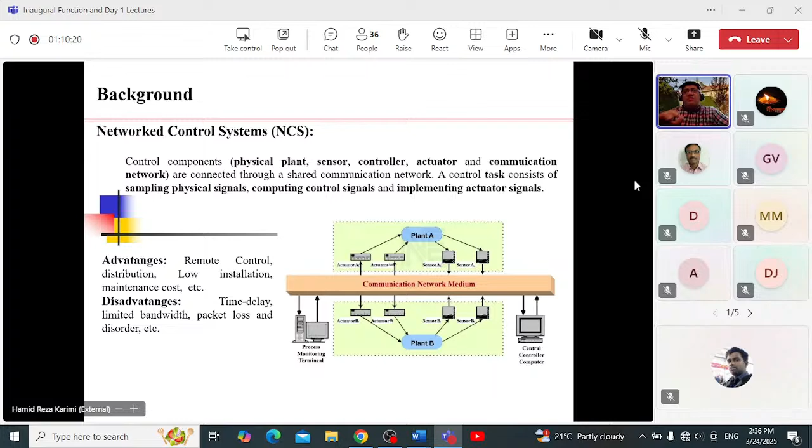So besides NCS, we have the topic of CPS, cyber-physical systems. This is the topic we're basically focusing on in this course. The first thing is that CPS potentially can become an intelligent system. By adding some software, networks, and the cloud, it means that CPS can communicate through the cloud. Now we have a cloud-based design, and also industrial and information technology can be integrated in this system.

So CPS is also called a basic integration of the physical and the networks. And we have issues about computation, communication, and again, control, very similar to the context of NCS, the networked control system. Again, we have sensor positions, sensor selection, and we need to look at the physical system itself. The network also exists, and we have issues about the cyber systems.

So if you look at CPS, first of all there is system awareness, data sharing, and real-time analysis, and this kind of information should be sent to some sort of decision making for the task of system operation. So how the knowledge can be produced and how the knowledge can be circulated for better execution or operation of the system. Of course, optimization is always a concern of CPS.

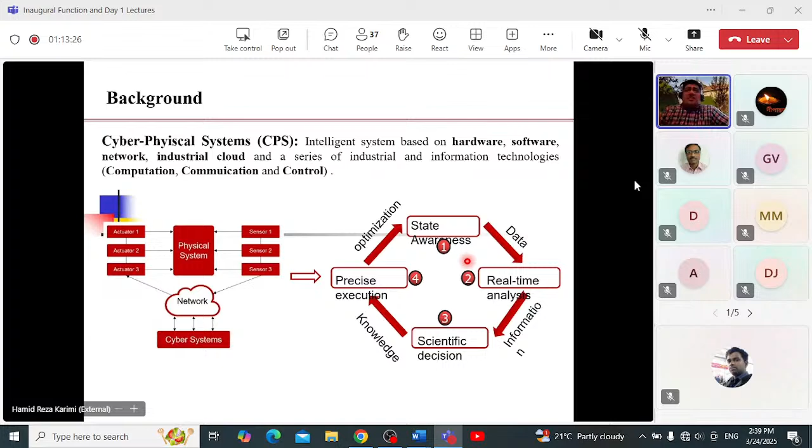And how the knowledge of the expert, I'm talking about the owner of this plant, could be sent as set points to the different subsystems is a very challenging topic. We have network integration, then we need to look at cybersecurity and resilience. This could be one example, and this example is very important in different locations, specifically for India.

Another technology is internet-based teleoperation. Again, we have a teleoperator as a master manipulator and also a slave manipulator. This kind of teleoperation has now become a very emerging topic in manufacturing and also in health. In Italy, we have a big European project about teleoperation for surgery in the hospital.

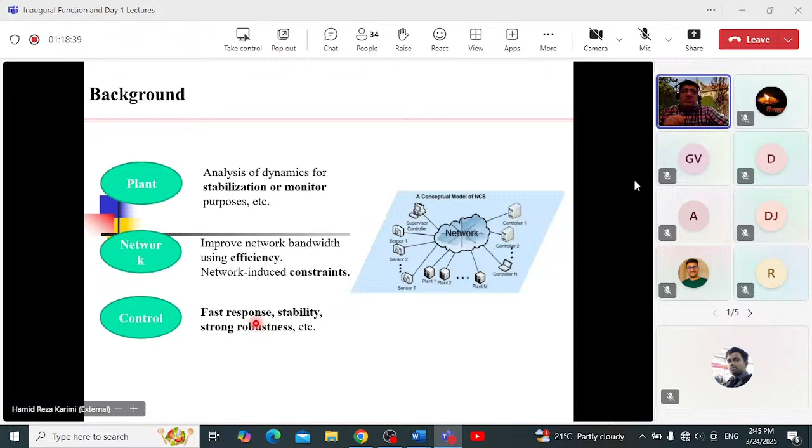In this course, we are talking a lot about different control scenarios. For instance, sliding mode control to get not only a fast response but also in limited time, meaning in finite time, with good robustness. So in the topic of CPS and NCS, depending on your interest, if you want to touch the modeling, the network, or the control, there are a lot of challenging topics. And of course, these are the matter of discussion papers.

At that time, they focused on future trends in real-time networks and wireless networks, and this was a very successful special issue. Then there was another special issue in the IEEE Control Systems Magazine. In this special issue, in the same year, 2007, other important scholars put forward the topic of complex networked control systems. This opened another research line, so other research could become the hot topic, and new topics have been added.

One of the new areas that has been added is resiliency and cybersecurity, and this becomes an important topic discussed in this course. For control systems, in 1998 it was introduced. So now we can notice distributed plants and real-time control. It means the integration of the physical process, the sensors, actuators, and controller through communication networks. This integration should be done in real time.

And this data transmission between devices is one of the key aspects of the utilization of NCS. So how can we realize resource sharing, coordination, manipulation, and also saving bandwidth? These are some topics where we need to look at the data scheduling from the sensor to the controller through the communication networks.

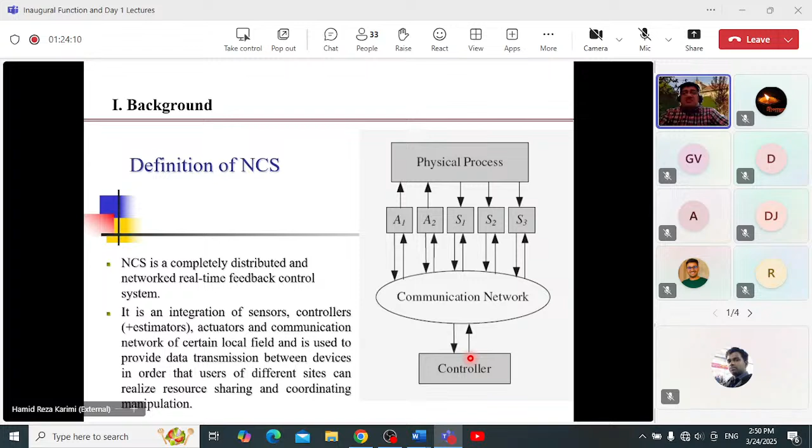So we have some typical NCS. So this is a model of a network control. So again, we have the plant. We have a controller. So we have the sensor, coming to the networks and also sending it to the controller for computation. Again, the data should be sent back to the actuators. So this is a typical NCS. And the network characteristics play an important role in these scenarios.

Okay, so if you want to make it as the filtering part, as an estimation, the same issues we have for estimation or the filter design. For instance, if you have a physical plant, and if you have some sort of input like a noise or some other information, so if you look at the two kinds of data, this is your signal, for example, your target signal, and the signal Y could be the measured signal. Then you can see after filtering, you can get a better estimation of this target signal, and then you will have the error signal.

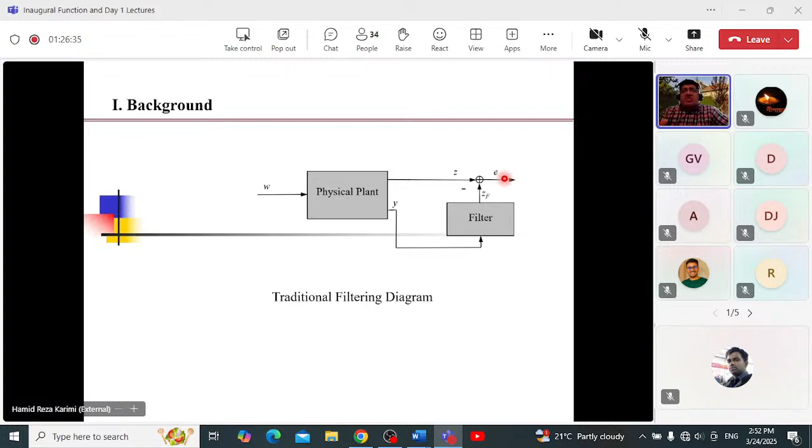So in these scenarios, we can see that this filtering part works based on if you could have a better filter design, then the error signal could converge rapidly to zero. So this could be the traditional approach, but if you want to take it over the networks, again, the data from the sensor should be sent through the network.

So now you can see the network-based filtering diagram. It means that the measurements are sent over the communication networks. So again, here it is very similar to the traditional approach because we are analyzing the error signal, but here the additive part is the information of the network, and this brings some challenges to the estimation part.

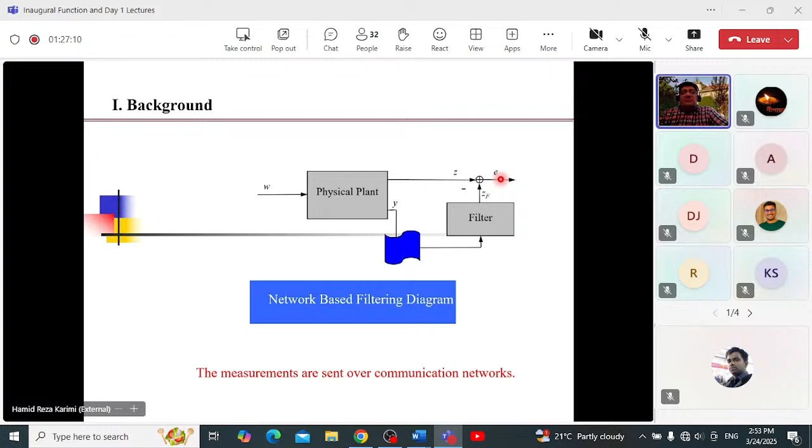Okay, so the advantages of NCS with respect to point-to-point interconnected control systems: the first thing is increasing the system reconfigurability. It means the scalability can be enhanced. So you can enhance the resource utilization, the reliability. So you see that the reliability can be enhanced in the context of NCS, because if you send less data with event-based control, then the system performance can be enhanced while saving bandwidth.

It reduces the installation and maintenance cost, because for wired point-to-point control, you can imagine how much cost goes to the installation part. But for NCS, you can minimize the installation and also maintenance cost. Supporting distributed control and intelligent devices means that you can move to smart control, a smart device, a smart sensor. Distributed control not only enhances the system resiliency, it also brings the opportunity to use smart devices. So based on these advantages, NCS became a very hot topic, and there's a lot of research on NCS.

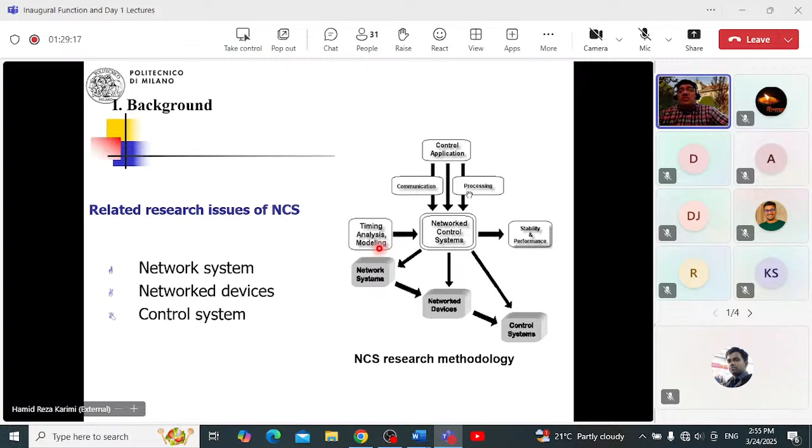So if you look at the network system, network device, control system, all of these bring some gaps for research. For instance, if you look at the network control system through the network system and network device control systems, we have a lot of issues about stability and performance, in real-time processing, communication through the control applications, and also about timing analysis and modeling. We can expect many issues, such as infrequent sending of data to the networks.

So when it comes to the controller, how to handle the decentralized information as well as the centralized information. There could be a huge discussion on how to move on from the central management level. These are the human knowledge. You see that an important topic in CPS or NCS is how to integrate the human knowledge, the management knowledge or the operator knowledge into the system operation.

So this topic of HMI, nowadays in Industry 5.0 in Europe, is one of the key topics: how to integrate, how to look at the interface between the human and machine, another interesting topic. And now there is another keyword, HMCI.

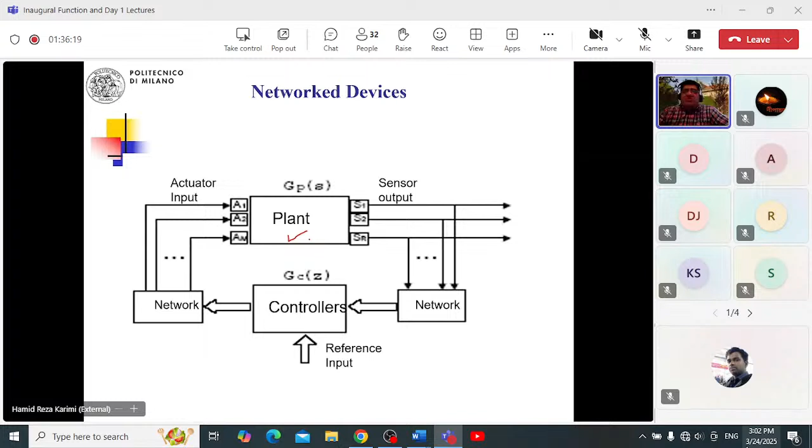Either you have a physical plant, you have a knowledge of the model, or if not, you have a data-driven model. So you need to look at this. So for instance, in the control system, you can look at the direct structure. In the direct structure, first of all, the sensor and actuators are at the same side of the plant, but only the data from the sensor to controller to actuator goes through the networks. So this is basically the sensor measurement and control signal, and this we call a direct structure. The direct structure means that the sensor, actuator and also plant have this orientation.

Another is the hierarchical structure, which is a bit different. In the context of NCS, it means that for these scenarios of the plant and also the sensor and actuator you can see here, there is a sort of remote system between the sensor data measurement, through the networks, to the main controller. So based on this kind of data packet sending from the sensor measurement to the main controller and to the actuators, there is also one unit as a remote controller. This remote controller will also be added to this remote system for the system operation. So this could be another architecture-based component.

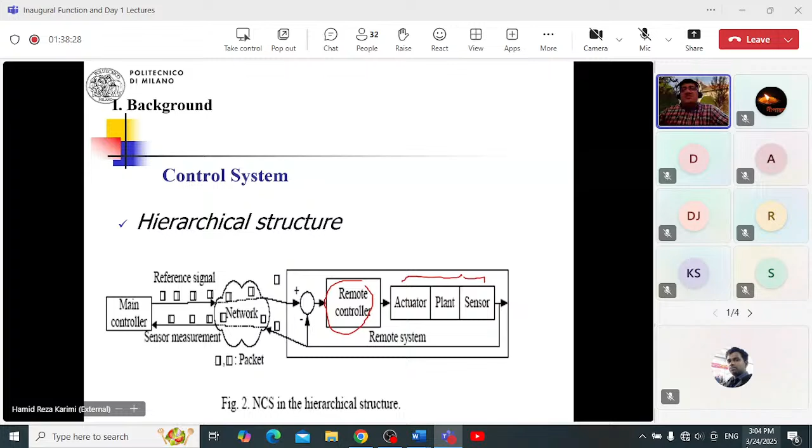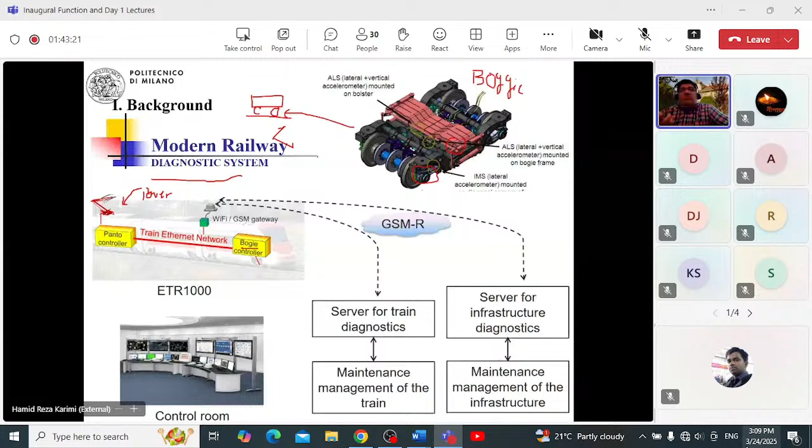I personally teach the bogie modeling to master students. But if you are interested, I can also give you some material about how to model this device and how to look at the stability of this device. One question for you is: if the speed of the train increases a lot, why is the train out of control? And how can we look at the high speed train? High speed train, what are the limitations? If you are interested, I can also explain in one of the tutorials for you. Okay, so now you can see that in the topic of NCS, we have a lot of challenges.

One topic is the signal transmission delay. So another topic could be the delay in the communication due to the buffering and propagation. So delays are bad for the controller. So from the sensors to the controller through the networks. So this could be the normal sampling.

It means that we have some sample data, and these are the 3 samples from your measurement YK. And this sample data can be sent basically to the controller node. Okay, so this is a signal YK. So for example, here you have a signal YK. So this signal can be sent to the controller, but now you can see that the data you get at the control node is a little bit shifted.

Now you can see that this signal can be sent to here, and also this can, for example, come to this position. So this is some sort of delay. TKSC is the time delay between the sensor and the controller. So when you send again this data after the computation, based on the delay from the controller to the actuators, there is another delay, TKCA.

Now you can see that this sample data can be shifted to the right. And again, this is also another delay that can be added. So now this is your sample data at this position where it reaches the actuator. And then if you want to send this control signal, it could be like this. It means that the control signal can be updated at this time, and not only at the sampling time K-1H. And if we look here, this is K+1H.

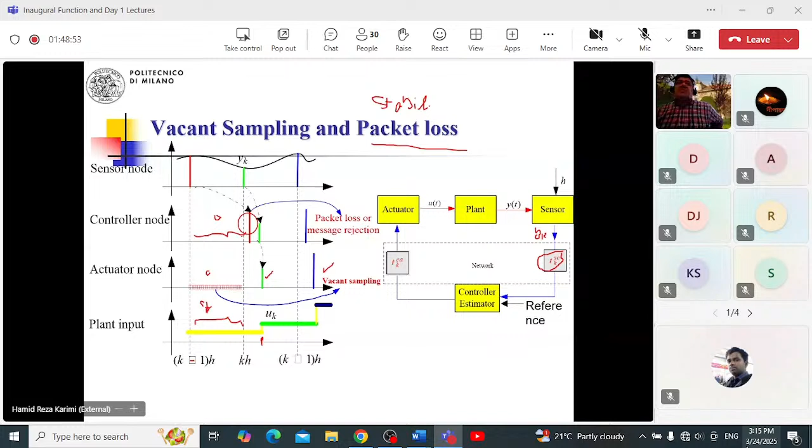Okay, so now you can imagine the NCS challenges and the solutions. So basically, okay, so there is one question. So yes, please. Do you have any questions?

Yes, sir, I had a doubt about the previous explanation. When one data is getting into the range of another data, on the next step in the actuator node, how is it reduced to only one data in that time frame?

So at this sampling time, because this red signal is sample data coming from this K-1H, but the system is ordering. The system can react to the green signal, because here you could expect some congestion of the data. The system basically can react to the information of the green signal, because the red signal is out of use, and that's it.

For instance, if you look at the sensor data from controller, from the sensor to the controller, the green signal arrives at this position, and the controller can react to this signal. This signal, in fact, some packet has been lost, and also has been rejected by the signal, because you know that the network has a sort of delay.

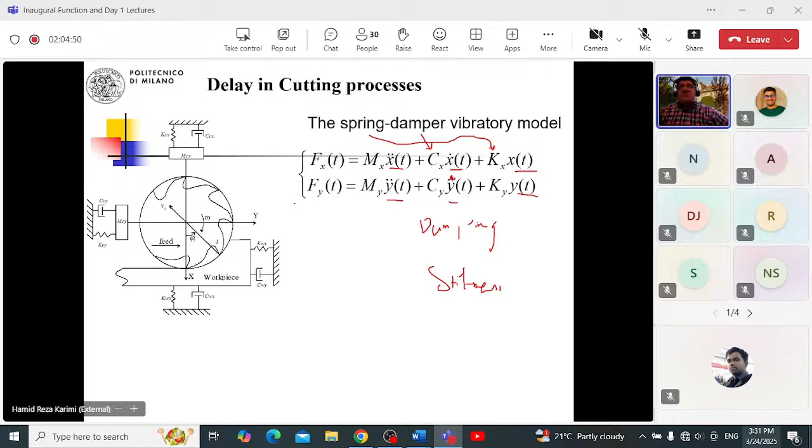If you look at the two forces, fx and fy, based on this mathematical model, you can start to look at the surface that can be generated. Here is the same problem - you have two forces here, two forces there, exactly the same x and y, and this cutter starts to rotate. At this position, this is the tip position of the cutter as it starts to touch the surface.

This area can be modeled like this point - it means the cutter touches the surface, but there is some oscillation, and this oscillation represents quality. If you want to get a good quality surface, you need a much more smooth surface.

Why is the surface not good quality? Because of vibration, and that's it. The topic of vibration is a very important topic. In this particular case, you need to know how to mathematicize the delay.

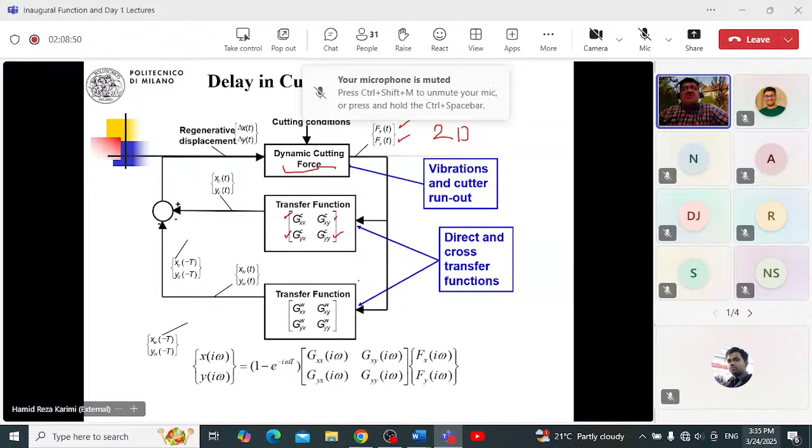You can also obtain some transfer function as a direct and cross transfer function. These are functions you can obtain, but I'm not going into much detail, I just want to show the main idea. In this transfer function, you can see there is a sort of delay appearing as a parameter t, because my focus is on t.

This delay appears in the sampling time. In the Laplace transform, you get this exponential term. This exponential term represents your ideal transfer function, and this is the transfer function after the vibration effect. If you look at this signal delta x, delta y as an error signal at this position...

You can obtain this kind of information in the frequency domain. This is about the appearance of the delay. In this case, if the delay appears, this exponential term should be added to the model, then you need to add this exponential term for the delay.

Now the delay appears in your transfer functions, and what you need to do is design the control to compensate the delay. So now the topic of delay compensation is important. In this application, you know exactly the delay, because I showed you how to calculate it. The next step is to design the control. This was one of the projects we did some years ago, and if you're interested in this area, you can contact me.

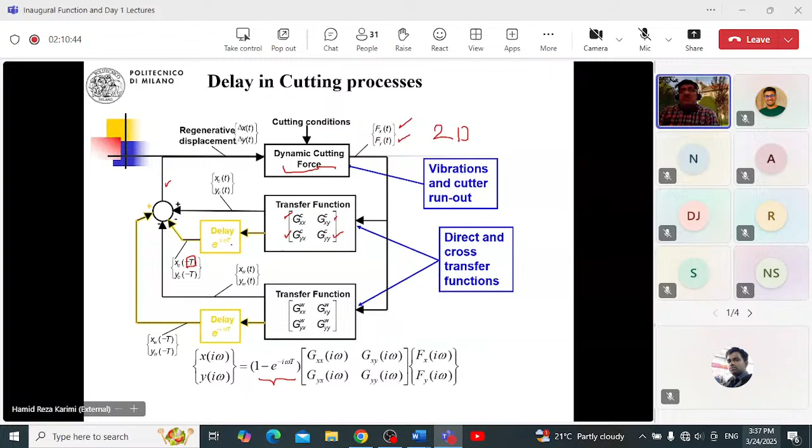For example, they are producing some goods, or even producing fruit, or transportation of the fruit from the south of India to the north of India. It means that you have a large production network. So there are a lot of autonomous working systems, and they are connected. But the point is that you get some order.

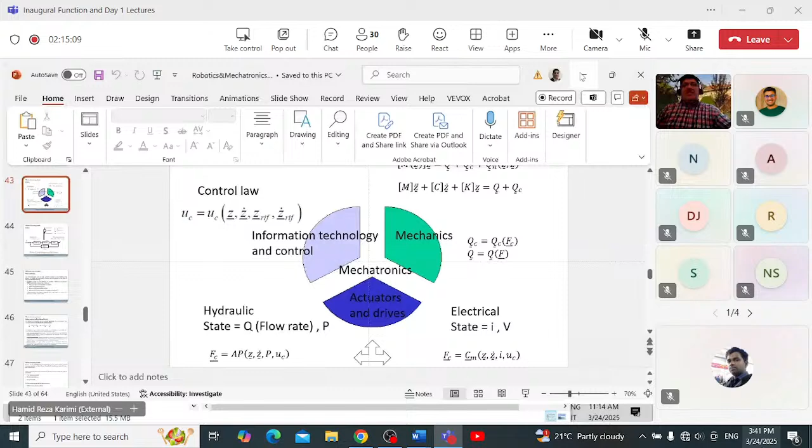Excuse me, sir. Can you share your slides? Yes, sure. I want to start the second lecture. Do you have any questions about the first part? If you kindly share the slides, it will be great for us. Oh, sure. I will send you all the material through the course coordinator. Okay. Thank you, sir. Okay, thank you.

Okay, so the second part I want to discuss is about the design issues for control systems. For this part, I would like to tell you a little bit more about the design issues for control. One topic is stability, which we discussed before. Today we focused on the sensor, the actuator, the system, and also the sensor model. But here, based on your sensor data acquisition and the reference signal, you could think about the performance and also stability.

For the stability and the performance, how capable is the system of following the reference signal? Because one topic is reference tracking or adaptive control. It means how to reduce the effect of the measurement noise. Where we have noise, we have some uncertainty in the model. So all these topics you need to look at in the design. When you design the control, first is stability, second is performance. The performance reflects the noise issues, uncertainty in the modeling, the disturbance, or even the reference tracking.

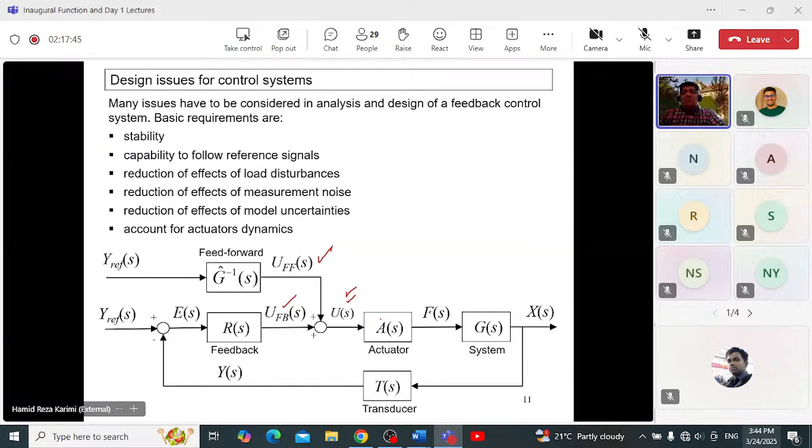So now if you design the control, perhaps you think about feedback control. Feedback control is to enhance the stability. At the same time, you can think about feed-forward control, which can be useful for the enhancement of the performance. So here you have two control signals: one is the feed-forward control, the other is the feedback control, and the total control becomes U(s). Okay, so this control signal can be applied. If the system is ideal, you can expect that the model of the sensor and actuator is identity.

Okay, so for this, identify the sensor and actuators with this function. So you have this typical system, and in this typical system you have sensor noise, you have a disturbance at the actuators, and also you have some issues about the error signal. For convergence, this should approach zero. At the same time, you need to look at the effect of the noise and also the disturbance.

So for this particular case, if you want to start to analyze, there are several transfer functions you can obtain. The first is the signal X(s), which you can calculate from this function. And also you can obtain the control signal U(s) from this function, and Y(s) contains the noise. If you look at this model of the system in the Laplace domain, the frequency domain, you can see that the noise appears here, and the disturbance D(s) also appears.

Okay, so now the important thing is that if you want to get a better control signal U(s), your control signal should mitigate the effect of the noise and the effect of the disturbance. But the problem is that the noise appears in the information Y, so how to look at the noise compensation. This is one of the challenging topics we have in the design issue.

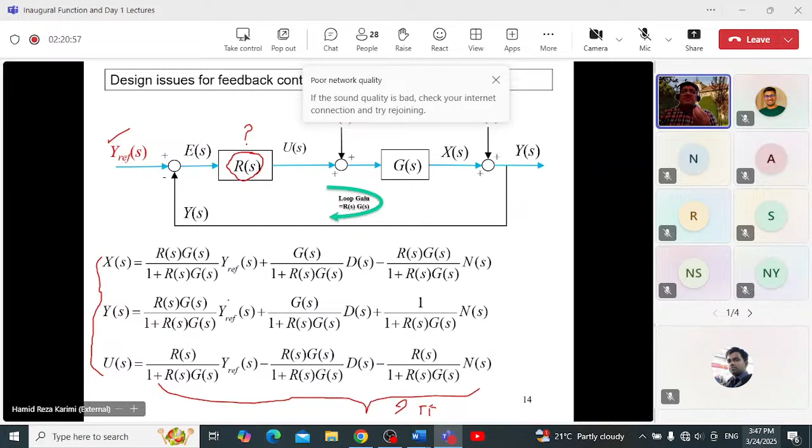So now the question is, if you want to design control, you can define errors, and you need to pay attention to how to design it in such a way that the reference signal appears in Y(s). It means that you need to do tracking. If you want to do good tracking, the error signal should go to 0. At the same time, you need to mitigate the effect of the disturbance and the effect of the noise. And everything should be based on these 9 transfer functions.

If you look here, the function Sn represents the effect of the noise. So you need to mitigate it, for example, Sn should become less. L(s) should increase, for example L(s) to 1. If you increase L(s), at the same time you can see that L(s) is multiplied by D(s), and this also increases the effect of D(s). So now there is a trade-off. If you want to design the control, there is a trade-off between L(s), Sn(s), and SL(s).

At the same time, you need to find a suitable control to find the optimal solution for this trade-off, because otherwise there is no solution. This is a challenging topic: if you want to improve something, then another thing destroys the performance. And this is the problem we have. Okay, so what should we do?

We need to look at 4 functions. One is the transfer function L(s), which tries to bring the reference signal to Y for tracking. Then you need to look at the 2 sensitivity functions, for the noise and for the disturbance. And there is another sensitivity function that gives the measured process response Y(s) to the measurement noise N(s). So now you need to pay attention to these 4 functions in the frequency domain.

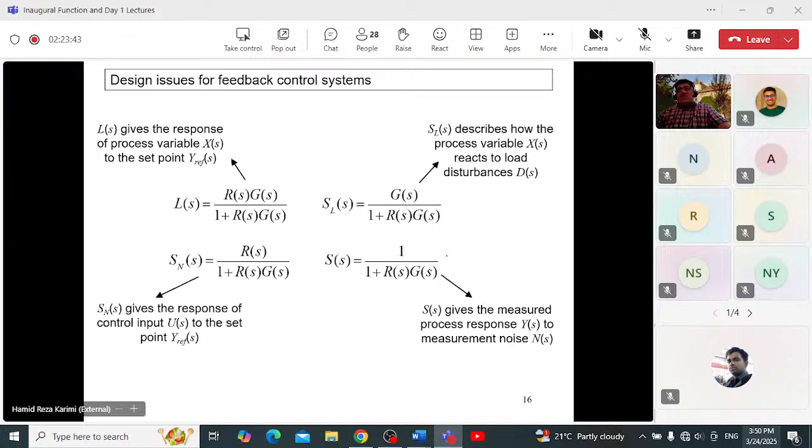Of course, there is some conceptual background coming from Bode. If you look at Bode's statement, he wrote his thesis, and in 1945 he published his state-of-the-art work on network analysis and feedback amplifier design. So Bode in 1945 introduced the topic of this function. This is the basic, simple case to find the trade-off between the basic sensitivity functions and how to manage the gain.

So the Bode integral says that this function over the frequency should be zero, and that's it. So this should be basically the one solution to satisfy the performance of the system for the sensitivity function. But if this function becomes zero, you can see that this function is an ln function. Some range should be positive and some range should be negative, and then this becomes zero, okay?

So if you want to see when it is positive and when it is negative, it depends on the magnitude of S. If S is less than 1, or if S is bigger than 1, here you will get positive, and here you will get negative, and then in total you will get zero, okay? So in these scenarios we need to find a trade-off to check the performance of the system, and this is exactly the task for the design.

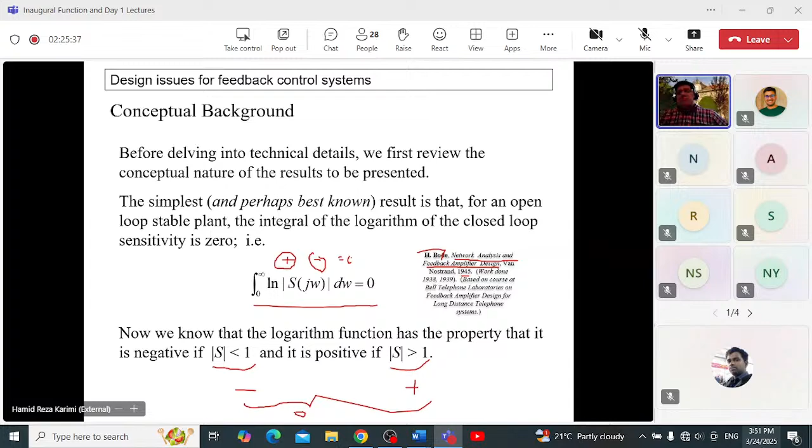Okay, so in these scenarios, you need to find the optimal parameter R, and then see at which frequency you want the norm of S less than 1, or at which frequency you want the norm of S bigger than 1.

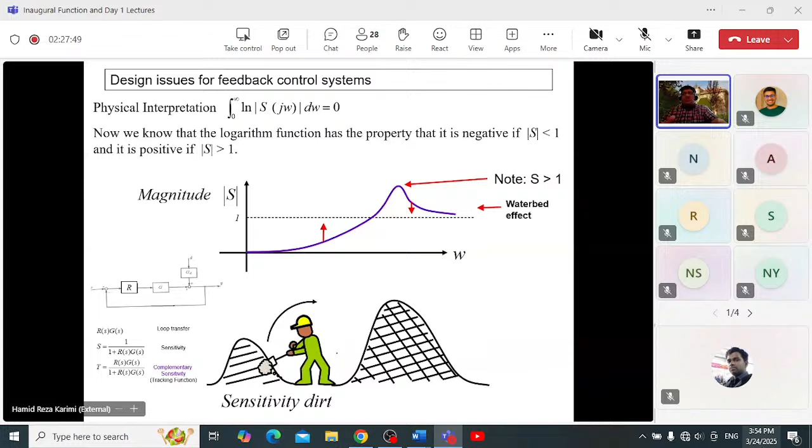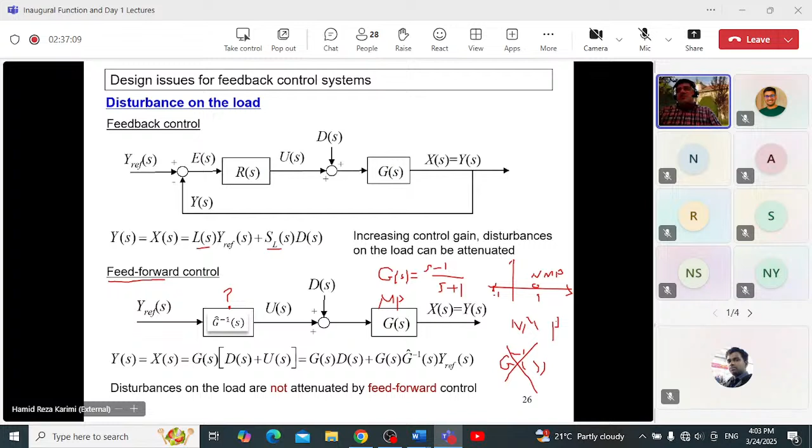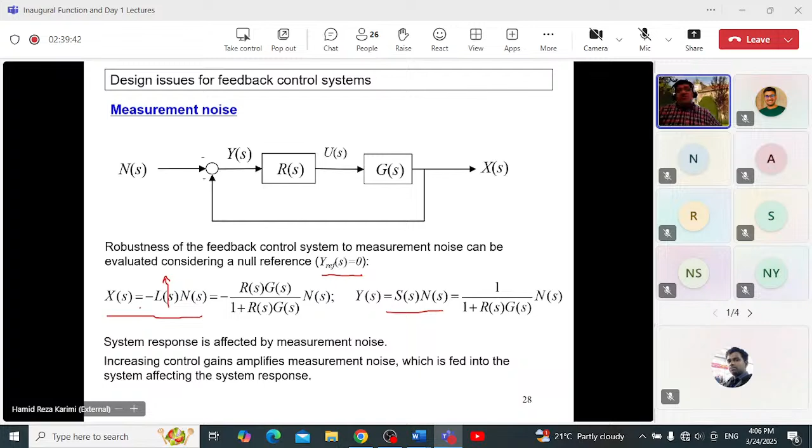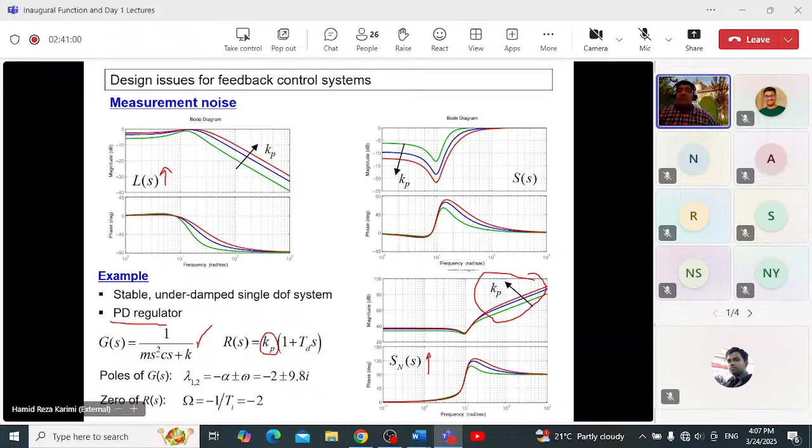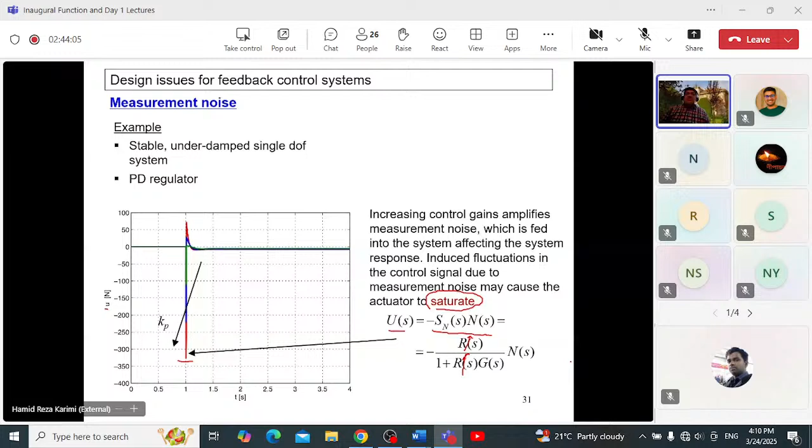So if you want to look at the control design, you need to look at the noise transfer function, because this also moves to one. The noise has a direct effect on the state and also brings some issues for the control. Here I showed you that by increasing R(s) you should expect this, and then you need to move to PI control. We need to look at PI, PD, or PID control, and then play with more parameters, two or three parameters.

Here I talk about KP. If you move to PID control, then you have KP, KI, and KD. Or you can look at PI control. So the question is that the selection of the regulator R(s) is very critical because it directly affects the response.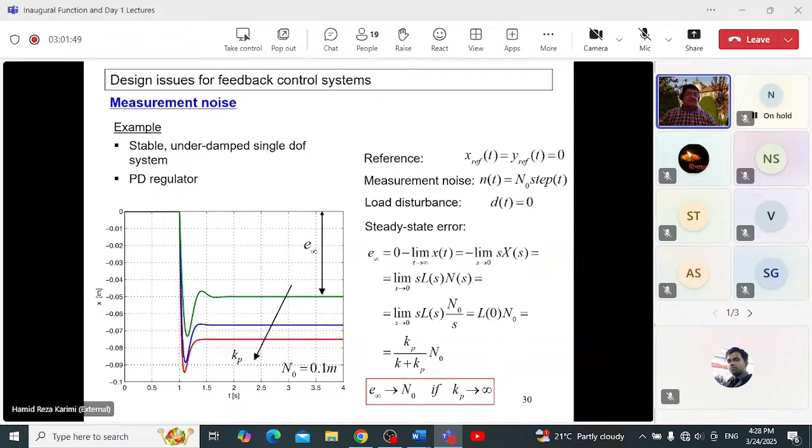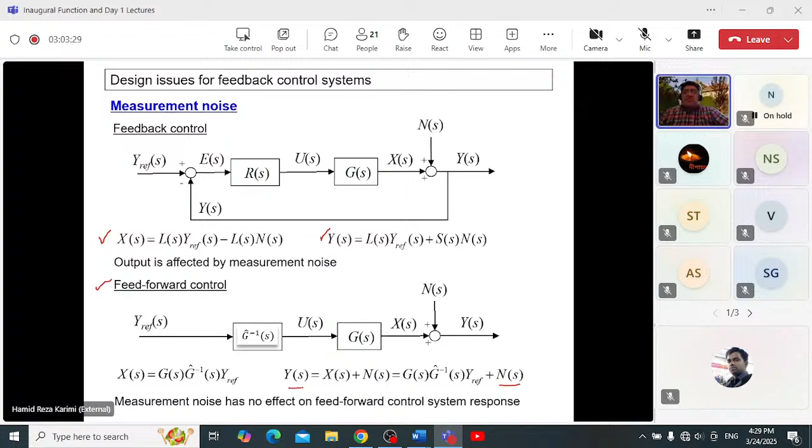I'll try to cover this part and then go to another control strategy. We discussed the design issues. We noticed that we have three players: the noise, the disturbance, and the reference signal. The noise effect is also increased by the controller, meaning the noise directly appears in your measured signal. For this case, the feed-forward control has no robustness with respect to the noise, so you need to look at the robustness of the feedback part. But the sensor?

This topic is about the sensors. In the sensor, one parameter is about the delay.

Assume that this is your physical plant, this is your controller. The controller is a P control, a P regulator.

So now the delay appears in your output. The function is e to the power of minus tau s.

When it comes to linear analysis, we need to approximate it. What approximation for e to the power of minus tau s? The approximation is 1 minus tau s, so when you approximate this function by the linear form, you can see that the delay appears.

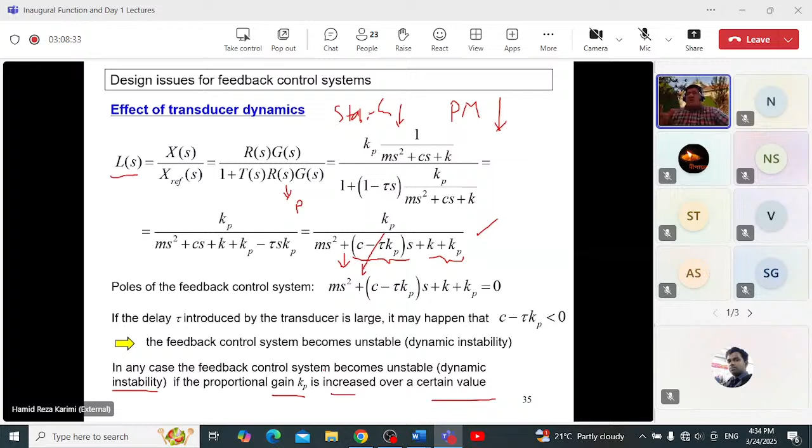As a summary, we talk about two functions: the sensitive function S(s), and also the complementary function L(s). The summation is 1, meaning that if L increases, S should decrease, and that's it.

We need to look at the load disturbance attenuation effect, meaning how S_L(s) can be attenuated. You need to look at the effect of measurement noise on S_N(s), and this function should also be controlled.

So now the question for you is: if you want to do tracking, or if you want to only reduce the noise effect, or only reduce the disturbance effect, what kind of control with which parameters of Kp, Ki, Kd? This is a traditional control we have for the physical plant.

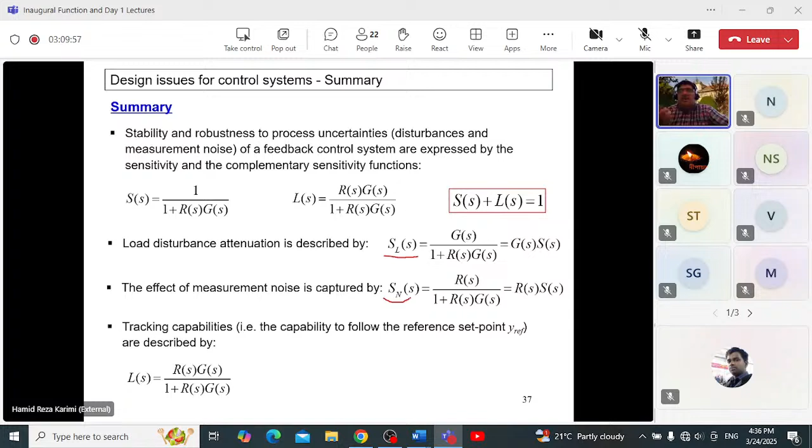So we notice that delay is an important part, especially sensor delay, and you need to pay attention to how to look at the function to improve the performance. But another important topic in control is the combination of feedback and feed-forward control.

Usually all the control textbooks focus on feedback control. But if in the future you do some project related to the oil and gas business, most industrial plants in oil companies are based on feed-forward control. So you can see feed-forward control is also important from an application and industry perspective. It's good to know how to combine feedback and feed-forward control.

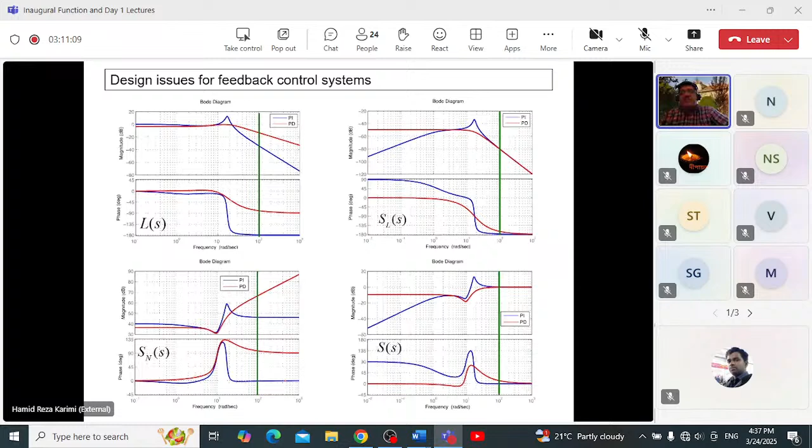I think I can skip this part. I could provide this example, but because of time, I'm going to the control strategies.

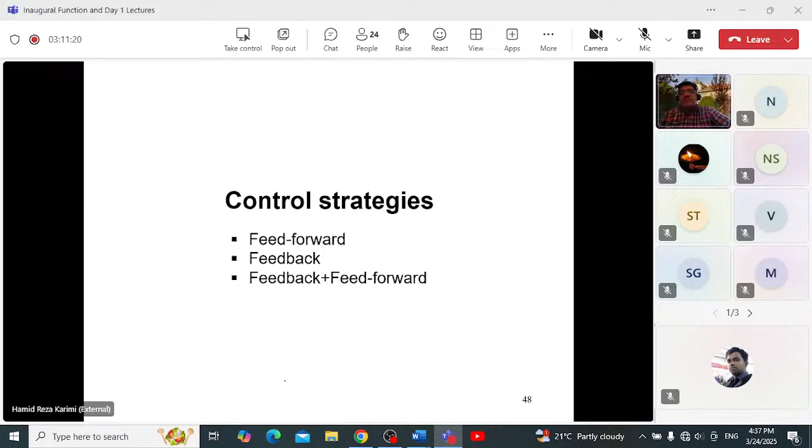In the control strategies, we now have feedback, feed-forward, and feedback combined with feed-forward control. I'll show you some scenarios of how we can reach the combination of feedback and feed-forward control.

Assume that you have this system. This system is a 1 degree of freedom model, a single degree of freedom vibrating system. This is the mass, this is the damping, this is the stiffness, and this is the force - basically the control force.

If you look at the hypothesis, the system is stable, and we are looking at the underdamped single degree of freedom vibratory system.

So underdamped means that the damping factor, the zeta, should be less than 1, okay? Something like this. And also the objective is fitting the mechanical system with the force Fc.

We need to design the force Fc such that this mass follows the reference signal Zref. So we want to see how this mass position, the center of gravity of mass, this parameter Z, can follow for example the reference signal Zref. So this is basically our target.

So you can write this mathematical model based on the mass, damping, and also stiffness. There are two forces, F and Fc. The force Fc, as I said before, is a control force you need to design. So there is another force, F, which you can see here.

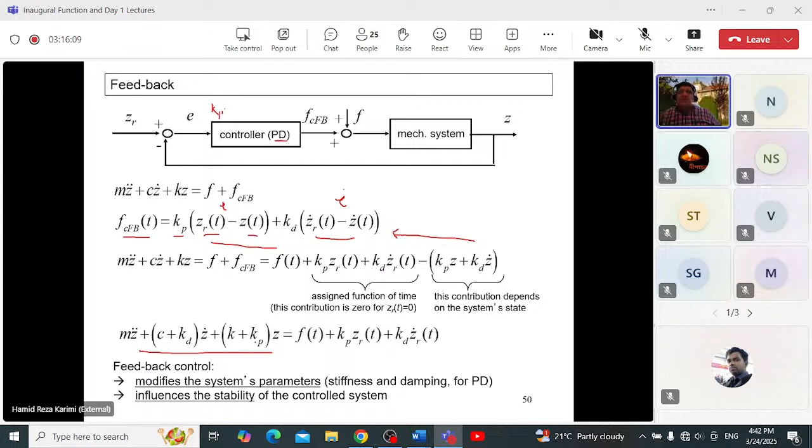Okay, so now you can see that by adding the two different masses here, so the M hat and C hat and K hat, we got some mismatching between the real mass and also the mass we have used basically in the model like this.

Now if M hat equals M, C hat equals C, K hat equals K, it means that you have a perfect matching. But in reality, you don't have a perfect matching, and that's it. You need to accept some uncertainty or some changes in the parameters.

So the feed-forward control does not modify the system parameter and does not influence the stability, and only the feed-forward control can affect the performance, and that's it. So one question in all of the design is how to choose the parameter and also what are the effects of this parameter over the overall performance.

So this slide shows the combination of the inverse dynamics, the feed-forward, and also the feedback control, and this is a mechanical system. And you can see that by adding the feed-forward control, you can enhance the performance analysis. So basically, these are the mathematical models representing all of the equations.

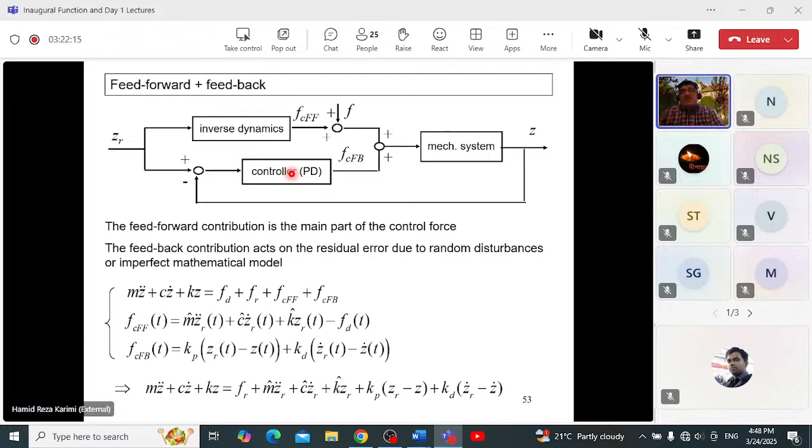So if you want to do this, from writing a mathematical model, you need to write, for example, these scenarios. But here you need to pay attention that we have used the PD control, but you can use different control, like sliding mode control or any other control, and then see what is the result. This is the question usually when I'm teaching this material - students are free to choose different control. But of course, we can start from the PD first, as a baseline, as a classical control, and then move on to the other control.

Okay, so the very important conclusion is this: if you combine the feedback and the feed-forward control, please pay attention that feedback control tries to change stiffness and change the damping. It means that you can enhance stability. On the right side, if you use the feed-forward control, then you can add additional care for the better tracking, for the better performance of the system.

It means you have a sort of mismatching between the different parameters. So it means that the combination of the feedback and the feed-forward generally allows you to obtain the best system performance, and that's it. If you go to some industry, I always say the oil company because I did many projects with the oil companies.

And I can tell you that all of the oil companies are mainly interested in the feed-forward control because it's very simple. At the same time, they can also get good performance, but what about stability? Because in that business, stability is always guaranteed and there is not so much concern. But okay, so this could be one scenario I had to try to explain, but there are some examples like robotics.

So in robotics, if you start to mathematicize the dynamics of the robot to do some task, for example, following some particular position, angles, velocity or acceleration. So for this system, for example, if you look at the rotation of this pulley with this kind of spring and mass, you need to pay attention to how to design the control F.

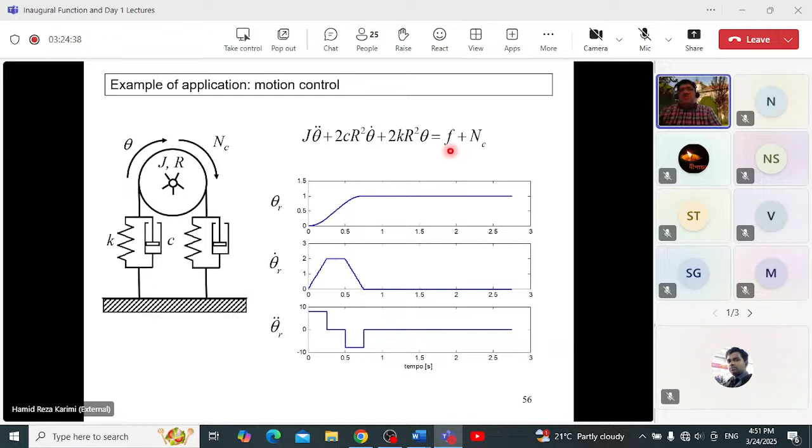But if you want to satisfy, for example, the tracking, you need to pay attention if you are using PD control or another type of control based on what I presented now. At the same time, there could be some loading or disturbance over the plant. So we need to pay attention to how to look at the effect of this kind of disturbance.

So for this model, if you want to have a rotation for the position theta, and based on this control signal, for example, if you are doing feed-forward control, as I told you before, for this dynamical model of the rotation of the pulley with inertia, damping, and stiffness, you can obtain the feed-forward control with J hat, C hat and K hat. But the shape is the same. You see the same mathematical model, only some parameters change.

So if you find the transfer function, you can apply the feed-forward control to the system like this, from your reference theta to the final theta, and if there is no external force, you get this mathematical model. If you have a perfect matching, what does it mean? If J hat is J, C hat is C, and K hat is K, you get perfect tracking. But of course, if you don't have perfect matching, you cannot achieve perfect tracking.

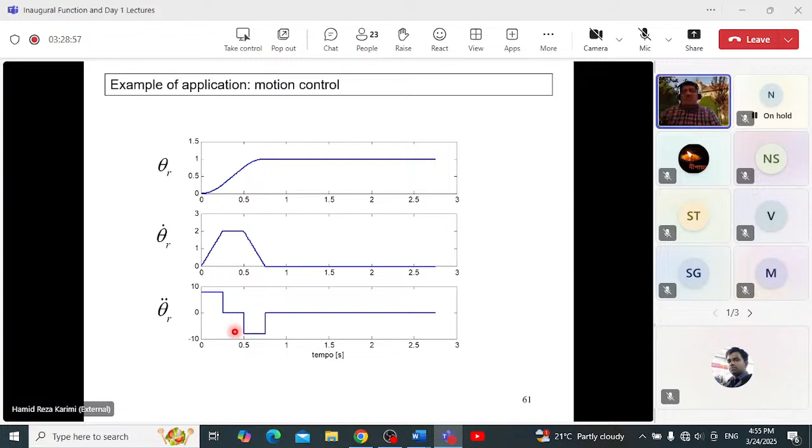For instance, this could be your reference signal, velocity and acceleration. If you have feed-forward control with perfect matching, J hat is J, C hat is C, K hat is K, you can see a very nice tracking, a ratio of one. It means your performance is perfect because you have perfect matching.

How can we achieve this good result? Because the feed-forward tries to enhance the tracking, and the feedback enhances the stability. And this is the main idea behind this motion control.

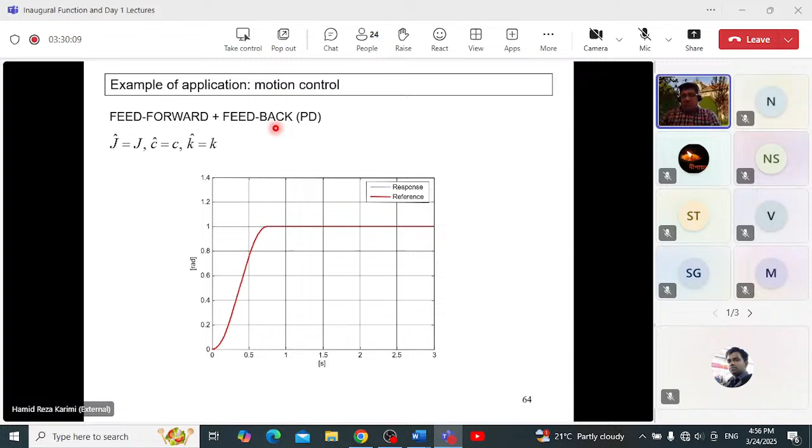So this means knowledge. If you have good knowledge of the system, you can get a better design. But if you have less knowledge, you are always in the underestimated case, and the performance never reaches the ideal case.

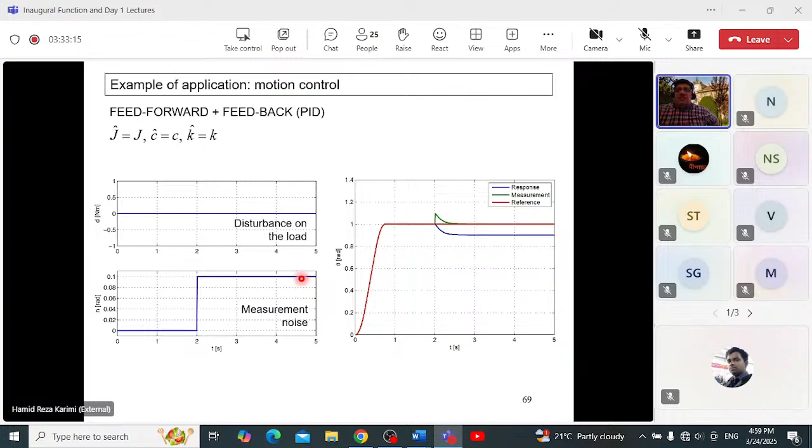So as a summary, feedback and feed-forward control can give some advantages compared to each of them separately, because you can improve the stability and also the performance. But this is a sequential design. You first design the feedback control, and then design the feed-forward control to get your desired response. The important thing in feed-forward control is good knowledge of the system, because you need a good matching of the performance.

Okay, based on this discussion, we can talk a little about resilience. Resilient control systems in different applications like power, electric, water-based systems, oil, telecommunication: the network control system has provided a mixed blessing in the ability to interlock the system of systems.

Okay, do you have any questions?

Sir, just a very small query related to feed-forward control. As we know, and as you mentioned in your presentation, feed-forward control requires explicit knowledge of the system. So getting the knowledge or information of the disturbances coming to the plant is practically not possible. In that situation, how can we proceed with the design of the feed-forward control?

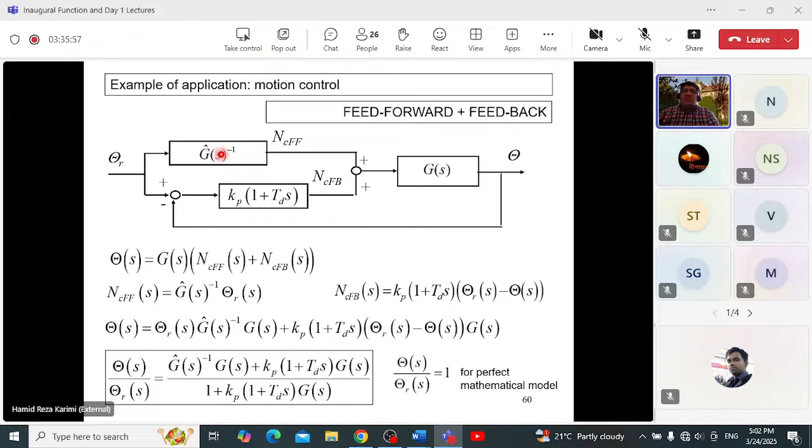Okay, sir. Thank you. Thank you, sir.

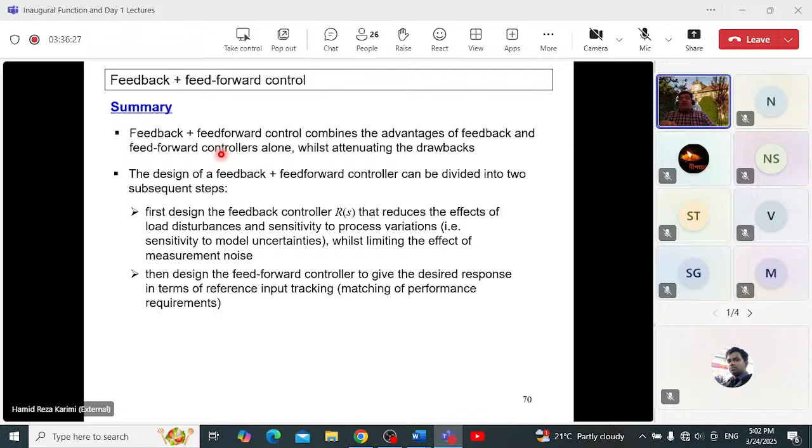Okay, you're welcome. After this discussion about the complexity of the system in control design, we need to look at either feedback, feed-forward, or the mix of feedback and feed-forward. Application is very important, because I'm not sure which kind of business we want to do in the future. Many industries need feed-forward control knowledge. Now we can come to another topic, resilience.

Resilience means that a system at any time is a system of systems. So one keyword here is system of systems, SoS. SoS is also part of CPS, and we need to pay attention to how we can look at SoS in terms of resilience. Because systems are connected, even across different industrial sectors, control system complexity exists from different aspects, as we discussed today.

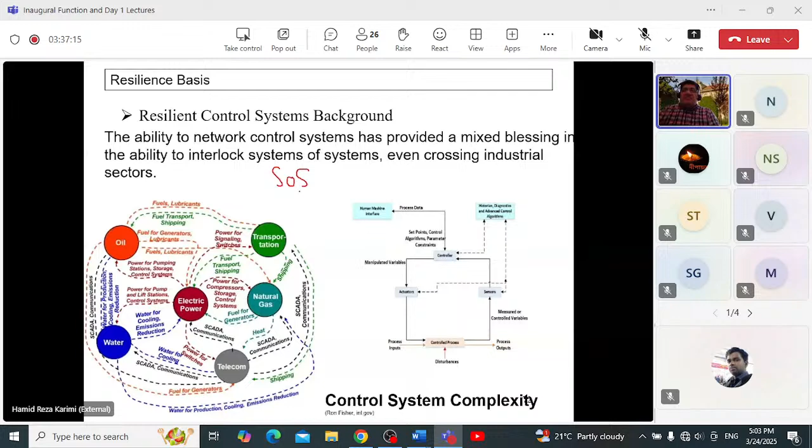So if you target the complexity in the control system toward a more secure or more resilient control system, you are trying to deal with the complexity of cybersecurity attacks, because it's growing very quickly. This means we need to pay attention to these aspects.

Today I also talked about the human-machine interface, because as I told you, in Industry 5.0 human system complexity is the major task: how to model the human in interaction with the machine. Human interfaces are loaded with data, and there is complexity in gathering the data for the operator or dispatcher and how to interpret it. This interpretation is a kind of interaction between the human and the machine

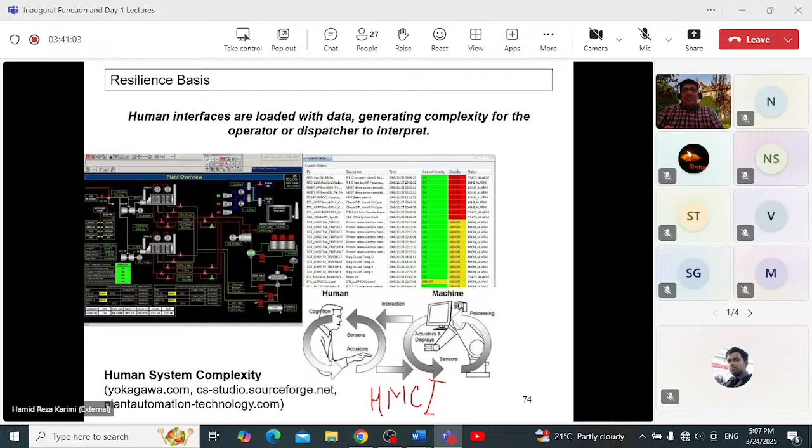But what is important is the integration of cybersecurity and machine learning or AI in autonomous cars, because here we are talking about HMCI, the human machine cognition interface, and this brings a lot of complexity in the resilience space. Okay, so there are some considerations arising from the complexity: unexpected condition adaptation.

So I told you about autonomous driving. At any time you have some unexpected conditions because the environment is changing; you have an uncertain environment. So distributed control addresses the complex interdependency and the latencies, the composition of the interdependent control system elements into simple stabilizable agents. Because this kind of system is a system of systems, I told you this is SoS. For the case of SoS, you need some strategy to control the system at different levels.

For example, in the context of SoS, another topic becomes important: multi-agent systems. For multi-agent systems, because the agents are collaborating and the agents are competing, you need to control the different layers of the agents. How to stabilize? These are some issues we have in the resiliency of control. It means that in this context, you need to look at the hierarchical distribution of the agents: which task has higher priority or importance?

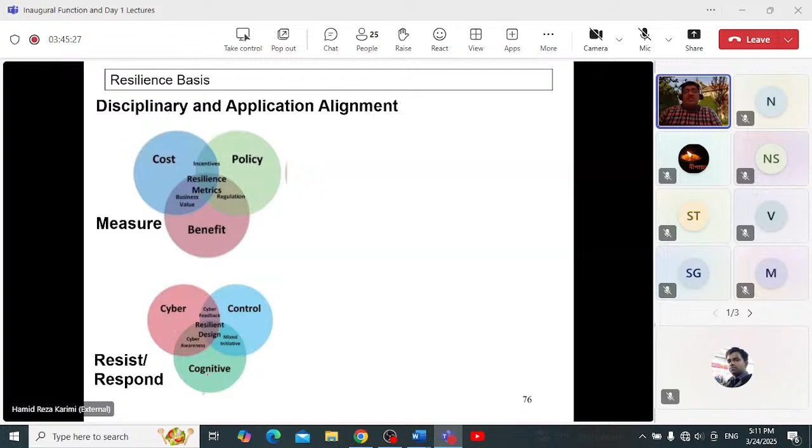Another topic is HMCI, the human interaction. As I told you, Industry 5.0 is exactly this topic: human performance prediction, cyber awareness, and intelligent adversary. So in the resilience context, there are a lot of considerations we need to pay attention to, such as cost and policy benefits. If you want resilience metrics and measurement, and resilience design, you have the cyber, control, and cognitive aspects. You can get again some resilience design.

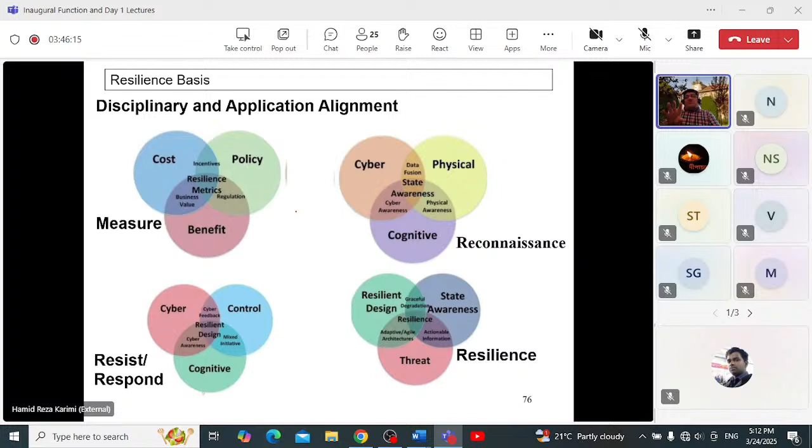If you want to come to consensus, in terms of reconnaissance for the CPS, you have cyber, physical, and cognitive. Then you can get some state awareness as a reconnaissance for the CPS. And if you want to come to resilience, you need a resilience design, state awareness, and threat information. Then by developing some actionable information and adaptive architecture, you can reach resilience. So measure, respond, reconnaissance, and resilience: these are four disciplines in the context of the resilience of CPS.

There is a statement: next generation control systems, from reliable to resilient. There is a very good definition. It says that resilience is the capacity of the control system to maintain state awareness and an accepted level of operational normalcy in response to disturbances, including threats of an unexpected and malicious nature. This is a very standard definition. So now the capacity of the control, the resilient control, and also how to keep the state awareness.

This is basically one of the important challenges, because for resilience you need to enhance the reliability, and you need to look at your reliable information. Reliable information, as I told you before, is coming from this state awareness, because if the data want to be changed to information, you need to look at the reliability. You need to trust. Reliability to resilience is an important topic we have in resilience control design.

Okay, so there are some transformational threats for resilient control systems in the national challenge about cascading failure, cybersecurity, and also addressing challenges as an outcome. It means how to minimize the impact to infrastructure: intelligent architectures, diverse detection and response protection at each level of the control system architecture, advanced control design. So basically, assess degradation and proactive control, cybersecurity and human factors.

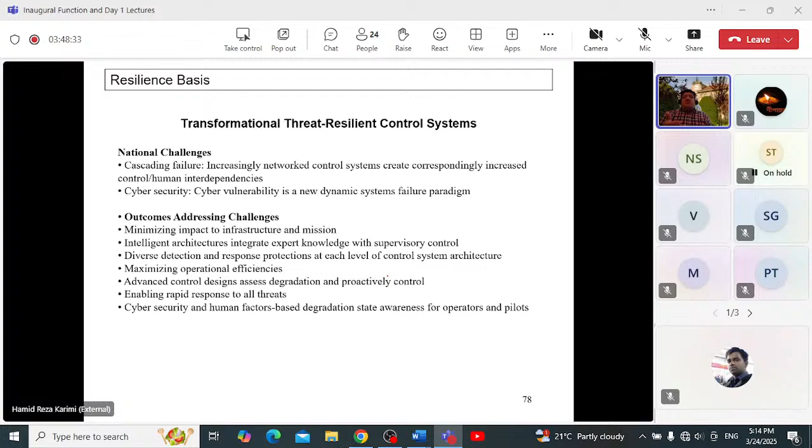So now you can see the challenges we already know about: some failures, some attacks, cybersecurity, and the outcome of enhancement. One of the important parts is from the control, and we try to discuss it, but very briefly, because reliability is one of the very important topics in resilience control, because we are talking about data translation.

One aspect today we talk about is centralized and also decentralized or distributed. So you can see, going from reliable centralized to resilient distributed control, there are some comparisons in the state of the art. One issue is unexpected condition adaptation. It means the centralized monitoring and control interactions are brittle to unexpected failures. So for the reliable centralized system, there is complexity, interdependency, and interaction that cause emergent behaviors.

For human interaction in the reliable centralized case, you look at common complex human performance variables and variation. But when you talk about resilient distributed control, for the same human interaction, you can look at prediction of human performance, and also autonomy interdictions, or the fusion and prioritization of the response based upon resilience priorities.

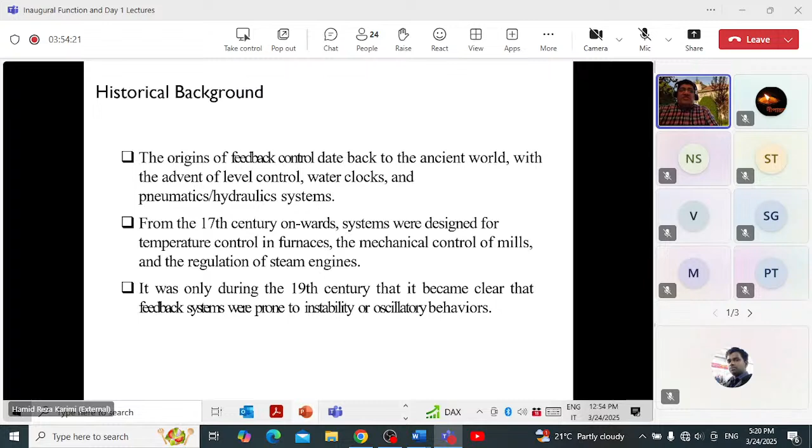From the state of the art, you may be familiar that a relay is one electrically operated switch—it's about switch control. So how do you switch from state 1 to state 2? This kind of switching or jumping.

The relay is one physical basic device, useful in some circuit designs, and therefore was introduced or integrated into the control system to perform some logical operation. This kind of variation in structure, by changing the modes of the system from 1 to 2 or vice versa, is the on-off control action.

These bring some difficulty in control, because if you do any kind of switch, you are jumping, and there is some nonlinearity in the system response. One of the problems appearing from relay-based control is that nonlinearity appears in the model because the switch appears in the system model.

But of course there has been a lot of development from the late 50s, 60s, and also a very famous person contributed a lot to this topic—Professor Utkin, basically in 1964. He tried to introduce variable structure control, VSC.

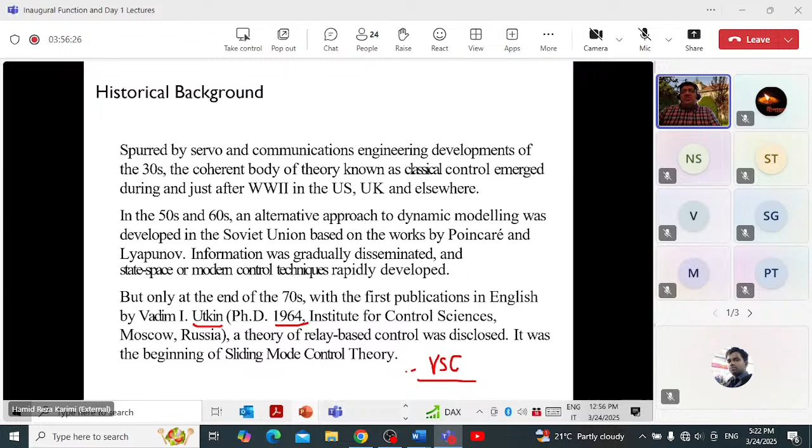He introduced the VSC, variable structure control, which later changed to SMC, sliding mode control. What he proposed also focused on the theory of relay-based control, and based on this theory he looked at some variation in the system—that's how VSC came into SMC. These are some keywords that were basically introduced, originating from the work done by Professor Utkin.

The basic concept is sliding mode control. First of all, the basic terms: we have some dynamical system like this, where for this equation we have a control signal U and a system state X.

Then you need to introduce some logic, introduced by the function sigma X. This function sigma X we call a switching surface, or a sliding surface—sigma is a sliding variable, and sigma(x) equals 0 is a sliding manifold.

What does it mean, a variable, and what does it mean, a manifold? Sigma(x) equals zero tries to give you one surface in 2-dimensions, or even one line, but all the variables should approach this manifold.

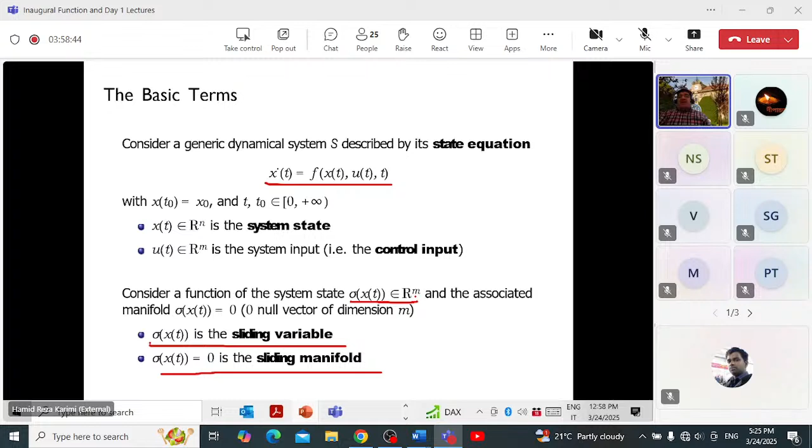A sliding manifold can be introduced and should be selected or chosen depending on how many states you want to control, and you need to add some dimension to sigma(x). So sigma(x), depending on the control signal dimension m, means that if you want to control n variables, you can define sigma(x,t) based on this as a sliding variable with this vector dimension, and then design the control.

This can be a sliding surface, or it can be given by the intersection of several surfaces. This could be one single surface, or it could be an intersection of several surfaces—this could be your sigma equals zero, or this could be your sigma equals zero.

Assume that for sigma zero, all the state trajectories should converge basically to these sections.

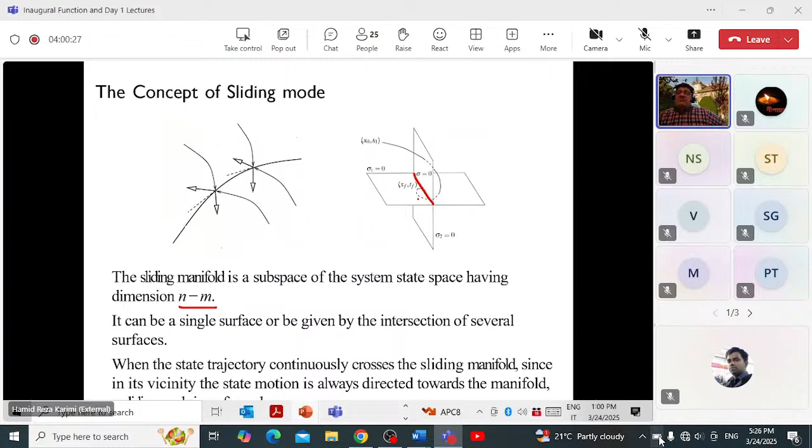If the state trajectories continuously cross the sliding manifold, since it's in the vicinity of this state motion, it's always directed toward the manifold. So when the state trajectories hit this sliding manifold, they can push forward to move to sigma zero, and this means convergence can be guaranteed if we follow this concept of sliding mode.

If you look at the design ingredients, there are two elements. One is a sliding manifold, the second is a control law. A sliding manifold is sigma of x - it means how to choose sigma zero, and this is one parameter to be designed.

The system in a sliding mode, we try to look at how the asymptotic state can regulate to zero if it comes to the sliding manifold. But the control law has to be chosen in order to enforce this - this is very important - a sliding mode.

After a state hits or approaches the sliding manifold, there should be some motion around the surface - some sliding motion. This means the control law should be responsible to guide a state trajectory to this sliding manifold, and then remain after some saturation or fluctuation around this sliding surface.

So a sliding mode needs to be enforced in a finite time - reaching from the initial condition x0 to this point should be done in a finite time. That's one of the characteristics of the requirement for sliding mode control or sliding mode motion: the finite time behavior.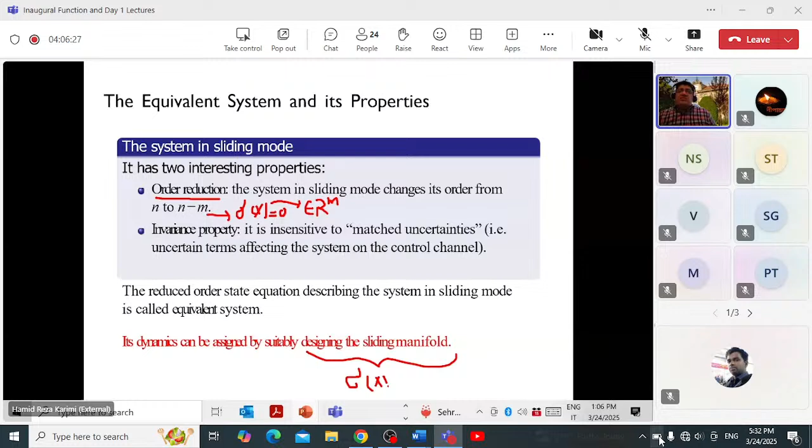So its dynamics can be assigned by a suitably designed sliding manifold. Now the important question is how to design this sliding manifold sigma(x), because all the challenge is related to sigma(x).

So here's one example. We have this unstable second order system. If you look at this system, you will see that it is unstable.

For this unstable system, we want to design the control input as u equals minus 3x1, or u equals 2x1. If you choose the control signal u as minus 3x1 or 2x1, you see that the control system has an unstable focus if u is minus 3x1, and a saddle point if u is 2x1.

If you look at the control signal u equals minus 3x1 and look at this equilibrium point, you see that the trajectories are diverging, diverging to infinity. This means you have an unstable focus for u equals minus 3x1.

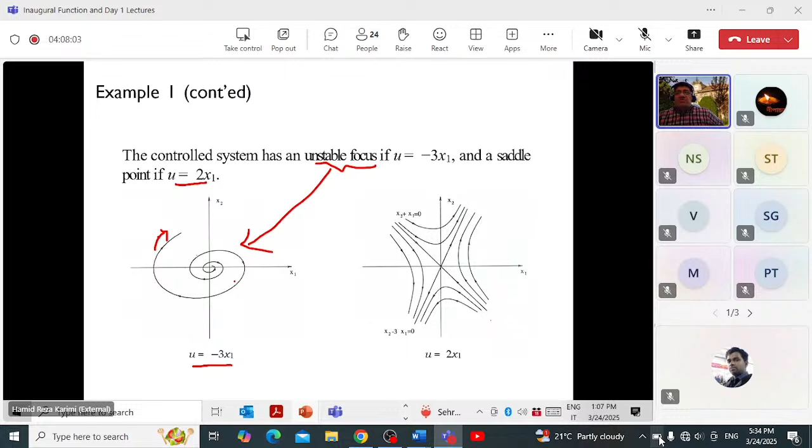For the case of u equals 2x1, you have a saddle position. If you look at the state trajectories x1, x2 with the control signal u equals 2x1, you see the trajectories have such a behavior. This behavior is the saddle point, and this other behavior is the unstable focus. These are the two behaviors you see for the two different controls.

Now we choose another manifold. If we choose a sliding manifold sigma as C1*x1 plus x2 equals zero, with C1 positive, then we design the control input as a combination of the two previous control laws.

So now we choose the control signal like this: u is K(sigma, x1)*x1, where K(sigma, x1) is minus 3 if sigma(x1) is positive, or equal to 2 if sigma(x1) is negative. Remember from the previous slide, minus 3 was u equals minus 3x1 — that was u1 — and 2 was u equals 2x1 — that was u2.

So notice this unstable system, with the two different control signals u1 and u2, is again unstable on its own. But if you bring it into the context of a sliding manifold and a sliding mode, choosing such a switch — switching based on whether sigma(x1) is positive or negative, becoming minus 3 or 2 — switching between the two controls, you can see the effect of U2 and U1.

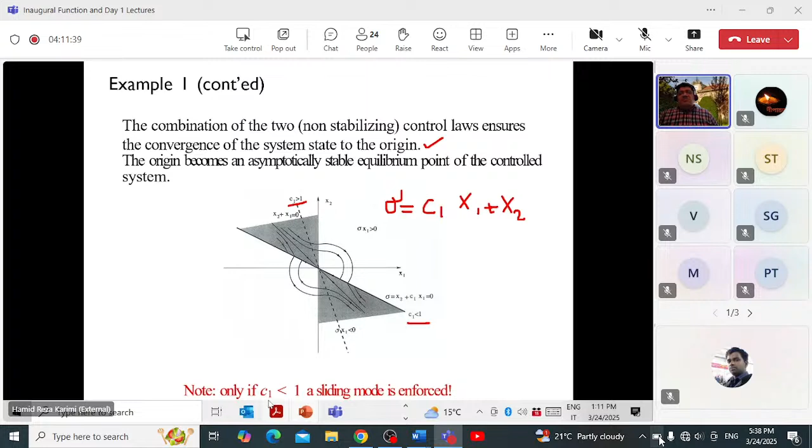So in this case, if C1 is less than 1, a sliding mode is enforced. It means that for the case of C1 less than 1, we can reach the sliding manifold, and this system can be stabilized.

But for C1 bigger than 1, there is no convergence. You see, there is a dashed line. Okay. So in this case, what we can notice is that the parameter C1 should be less than 1, and then all the state trajectories can approach this manifold.

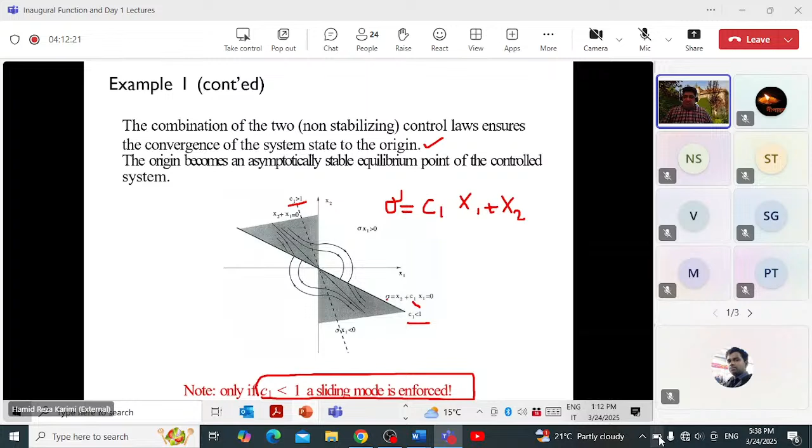Okay, so another example is the double integrator. So this is another example. For this example, with the constraint that the control signal U is less than 1, you can choose the sliding manifold sigma like this. Okay. Usually, you can choose a linear shape for sigma, like C1 x1 plus x2 equals 0, and

C1 is positive. So if sigma equals 0 in a finite time TR, the finite reaching time, then in sliding mode the dynamics of the equivalent system are of reduced order like this. Okay, so this says that the system has a finite reaching time TR to the manifold sigma equals 0.

And then when it reaches the manifold sigma equals 0, so for T bigger than TR, the system has a sliding motion, a sliding mode. A sliding mode means that, for example, if this is your sigma equals 0, when the state trajectory starts from x at time zero and arrives at this surface, it starts to have some motion like this.

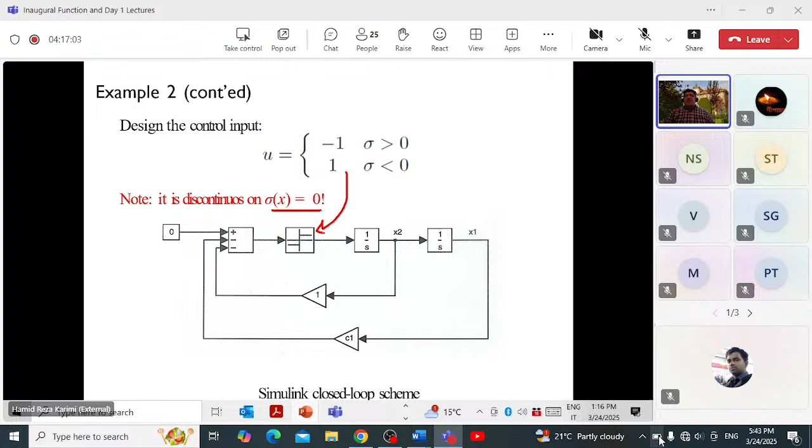And then they slide toward the origin as a sliding mode. So whenever they reach the surface, they have some sliding motion along the surface.

Of course, before, they are following some parabola arc. There is a parabola arc. They are following such a shape, for example, something like this, and then they go to the origin.

You see something like this, and then finally they can come closer to the origin, but no sliding mode is generated. So this means that if C1 becomes bigger, you don't see any sliding motion, sliding or chattering. They can be on different parabola arcs, they become closer to the origin, and then they can converge to the origin. So this is another behavior of the system.

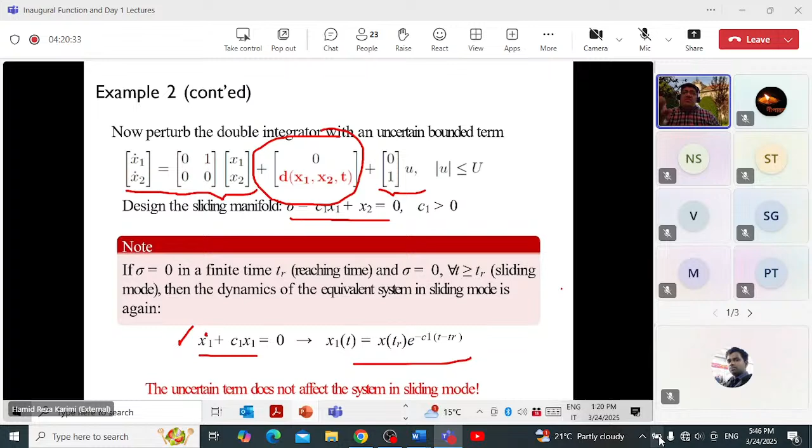So it's very interesting that you can see that x1 dot is equal to x2, and as I showed you before, x2 is minus C1 x1, and you can get this. So what does it mean? It means that this function d doesn't affect the system in a sliding mode, because of the structure of these dynamics.

Okay, so what can we learn? One is about variable structure control, VSC, and VSS. Making the system a variable structure system can have a stabilizing effect. It means that with this switch in the system, such a variation in the structure, you can stabilize the system. Sliding mode enforcement depends on the choice of the control law. It means how to choose sigma(x).

And the system in a sliding mode is of reduced order. It means that when you design the equivalent system of reduced order, the computation is decreased. The system dynamics in a sliding mode can be arbitrarily assigned. You can choose the system dynamics in sliding mode, it depends on you, but we need to pay attention to how to select the sliding manifold, and this is an important task. The system in a sliding mode has a nice robustness property. The system is robust, and this is one of the advantages we have from sliding mode control.

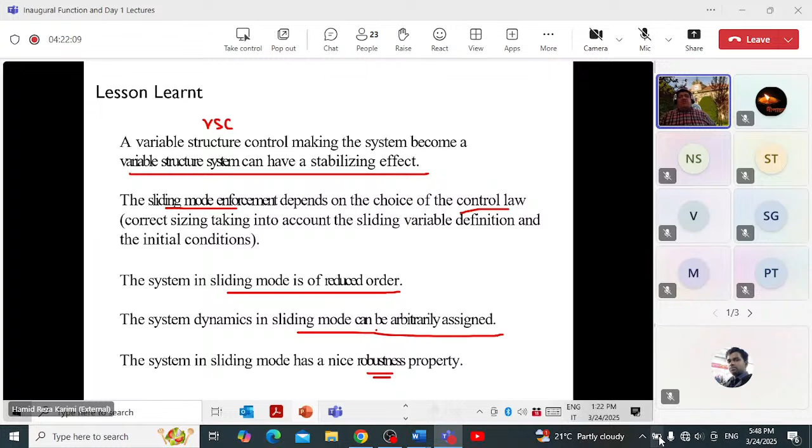Okay, there are different types of variable structure control laws. One of the variations is relay control. So this is one variable structure control, VSC. In relay control, the control signal ui depends on whether sigma i is positive or negative. So we have a two-level control, ui plus and ui minus, with dimension m, and then you have a sliding manifold sigma i(x) equals zero. In total, you can find the sliding manifold sigma(x).

Okay, so the design phase consists in designing the sliding variable sigma(x) and the smooth functions ui plus and ui minus. It means that for the whole design, we need to select sigma(x), and also we need to select these smooth functions. So these are the design variables. You can choose them for the relay control.

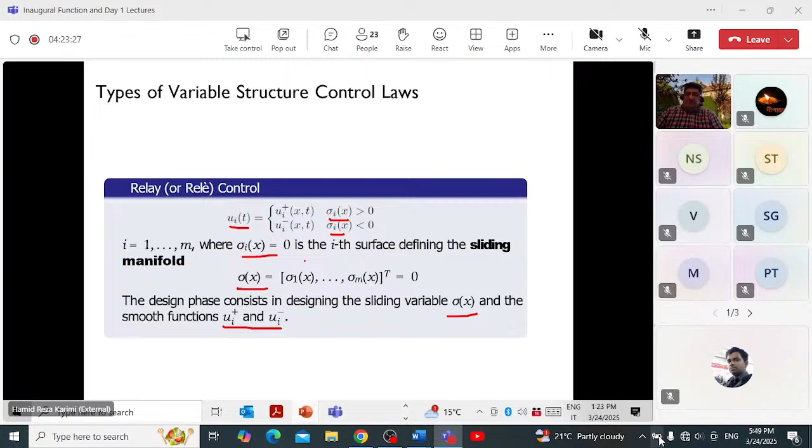So, state feedback control with switching gains. Now you have a control signal as a state feedback: u is psi(x) multiplied by x(t). So this is a function psi, which is a matrix. You can see it is an n by n matrix, and each term of this matrix, psi ij, can be selected from this expression. It depends on the sign of this function: positive or negative, you have two levels, alpha ij and beta ij.

So in this case, for instance the unit vector control: if you choose the control signal u like this, you know that this is equal to k multiplied by the sign of sigma(x). So this control signal is also the unit vector; they call it the unit vector control. You can, for example, choose like this, and this means that the unit vector control is one example of the state feedback control with switching gains. This is a general shape, and this could be another control, but you can choose like this. So the philosophy behind the unit vector control is taken from the state feedback control with switching gains.

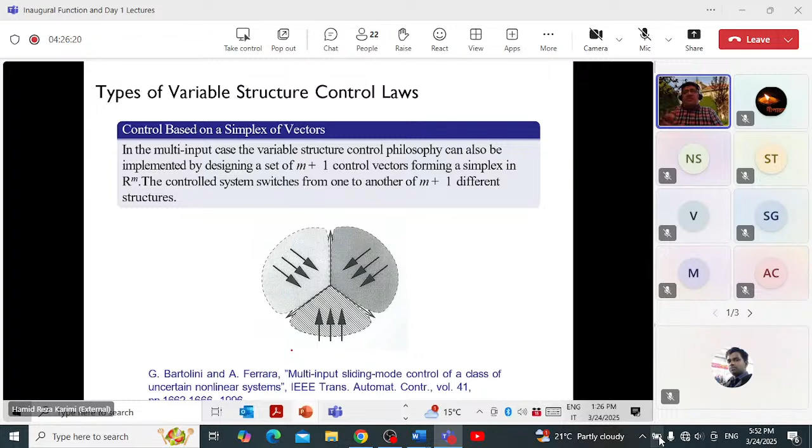So the idea behind the simplex of vectors is to give more flexibility by designing more control vectors. You need to design a set of m+1 control vectors, and then the system can switch from one to another, so now you have more switching possibilities. If you look at this publication on multi-input sliding mode control for nonlinear systems, you can get a better idea of how this simplex of vectors can be realized.

Okay, so there is some other discussion about the type of the system. Basically, one is the canonical form. In the canonical form, the assumption is that the system is nonlinear with respect to the state variables and linear with respect to the control variables. So the system should be affine in the control input, something like this. We call it affine in the control input: nonlinear with respect to the state variables and linear with respect to the control input. So this assumption means I'm talking about this dynamics.

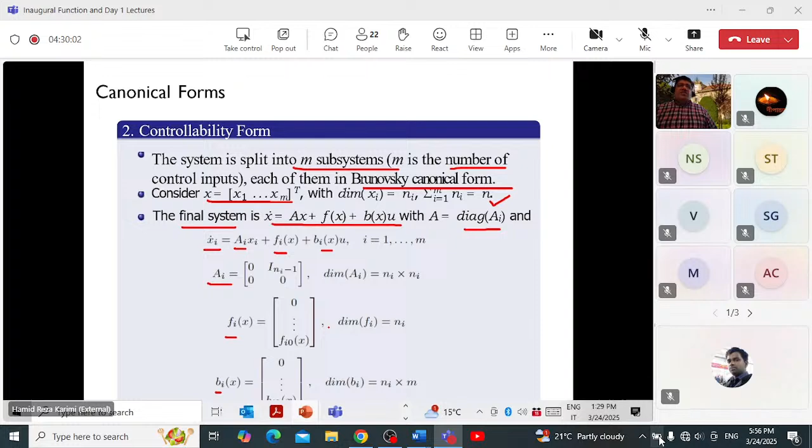I forgot to introduce the relative degree, but the definition is this. If you work with a nonlinear system, it means you need to take the derivative of yi in order to get the control ui out of it. If you need more information, I can send you another textbook to read more about this, or search on the internet. Time derivative means you need to take one, two, three or four times the derivative of the variable yi so that ui appears explicitly. This is the relative degree.